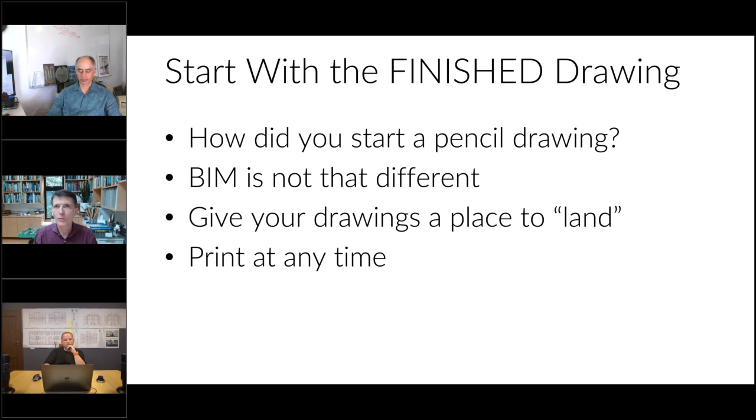So working in an office, you've got a deadline coming up, clients are going to be walking in the door in half an hour. You don't want to be messing around with your layout. You want to have that all ready to go. All you have to do is hit the button and go.

So this is a really dumb template right here. It's very basic. I mean, well, the model is dumb. It's just for, we don't design like this. It's just for illustrative purposes.

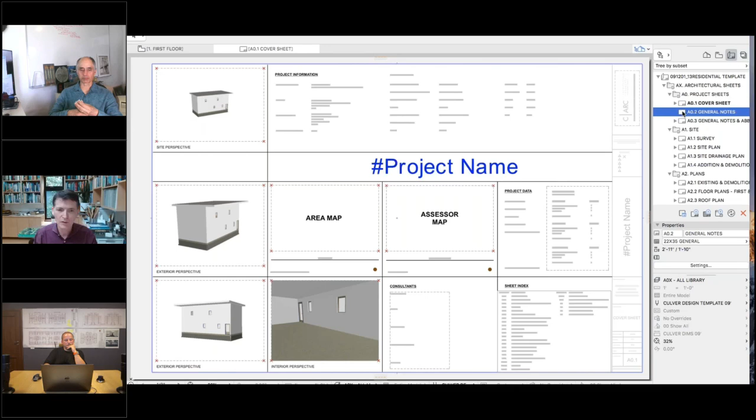But this is the cover sheet, and everything has a place to land on the cover sheet. So you've got perspective drawings, interior perspective, you got all the project data. It's laid out so that you can move on it, just like all of your other drawings and drainage plans and addition demolition plans. Everything has a place to go. So once you start drawing, they'll show up in the right places.

And you can expand the windows here for each drawing and make it fit your model. But you should do that early on once you've established how big the model is.

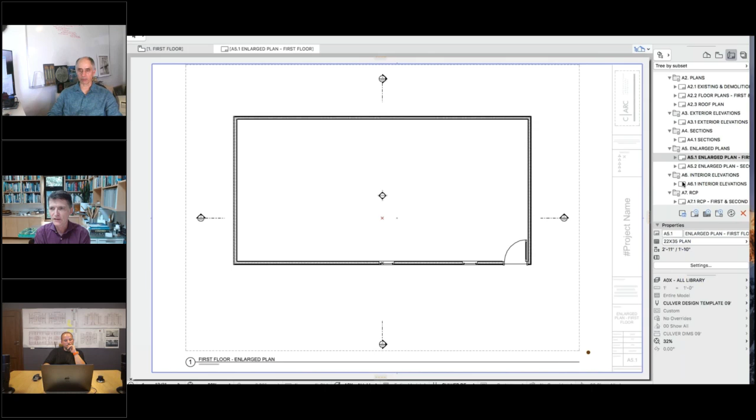And I've got to look to see my notes on this. Yeah, clear the windows. There we go.

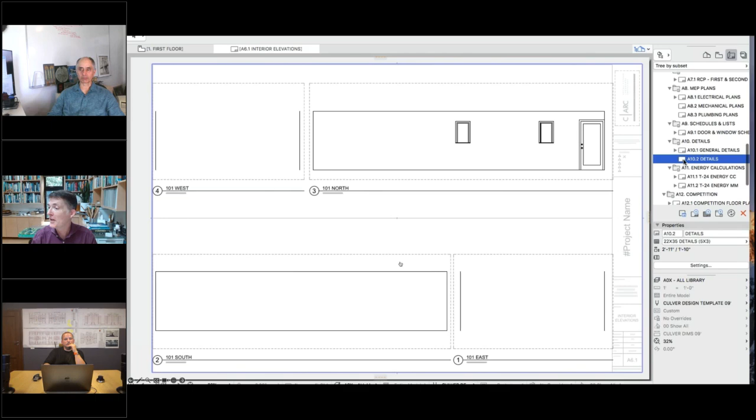Great. So some of these things are movies, so forgive me if I'm a little bit outside of myself and not knowing exactly what's going to show up because it's been several years since I saw this presentation.

So I think it's really important to model everything that you can. So you see here, we've got electrical outlets modeled. The kitchen is fully modeled with all of the counter overhangs built into the cabinetry.

Those are all built-in counters, built-in sink. All of the cabinetry modules within ArchiCAD can do this. Custom cabinetry, there's a custom pull-out or garage on the left side of the screen on the counter. There's custom details for the range hood. You see the lights sitting in there above the range.

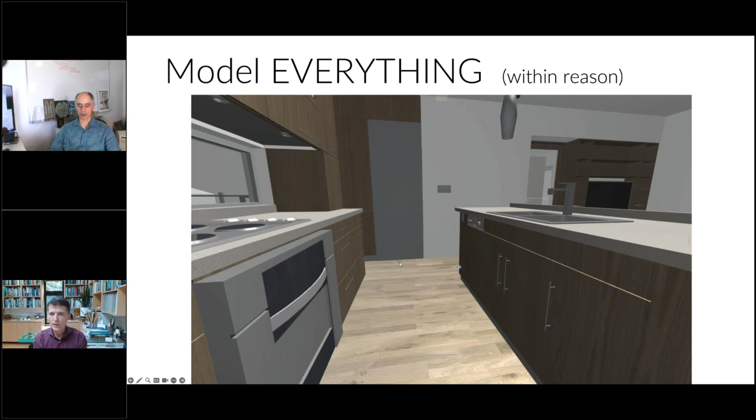As much as possible, you model everything. And the reason for this is that once you start changing things, it'll show up in your interior elevation drawings. So everything's here. So if the model of the kitchen changes, then this interior elevation will change too.

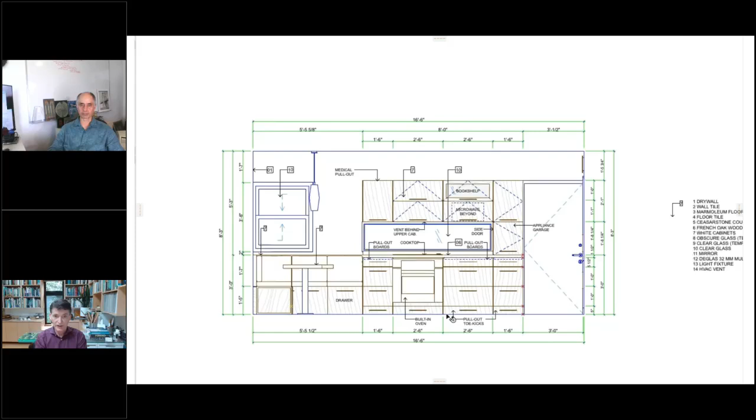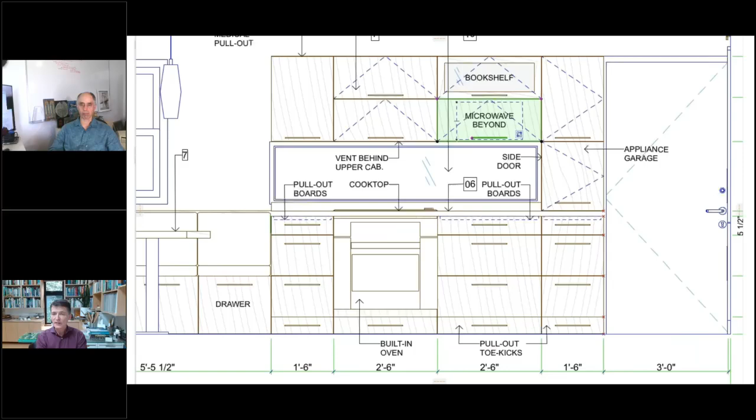So I think it's really critical. So here I'm just showing you, if I delete that drawer in the elevation drawing, it's going to be deleted in the 3D model as well, and vice versa. I think this movie is going to get me to that 3D model in just a second. Yeah, so I deleted here in this model, and you'll see it's being deleted in the other drawing as well.

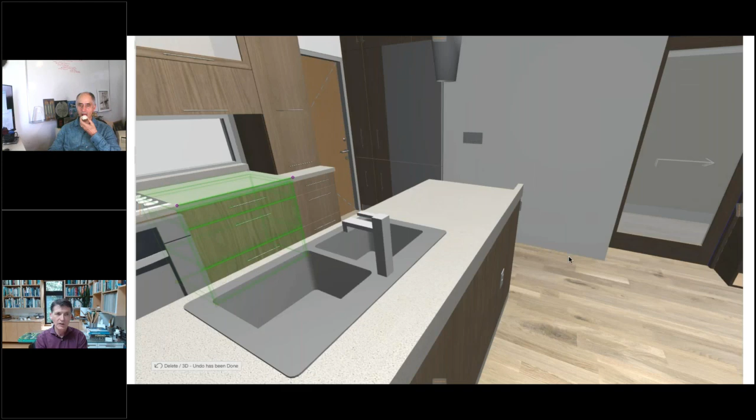So I'm going to show you an example of how things work. This is the 3D drawing. And this is now the elevation drawing. So in all the drawings that it's related to, it's going to show up and respond. Let me see if this movie is going to stop. Yep, looks like it stopped.

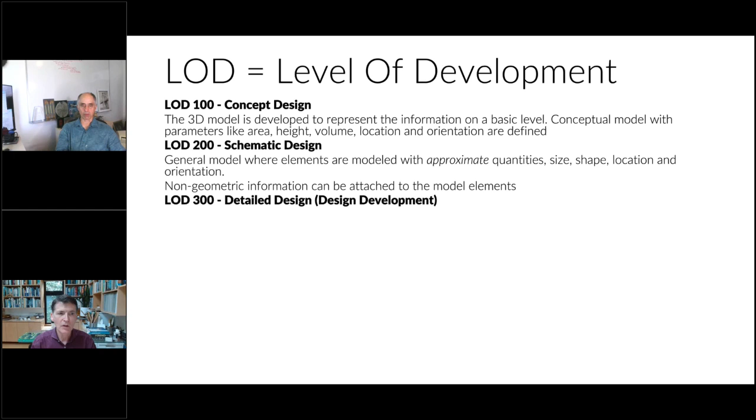Also, we talk about different levels of development, LOD 100. Honestly, I don't think about the numbers so much as I think about how do I produce a drawing really quickly at schematic design or pre-schematic design, and how do I produce drawings really quickly at design development, and likewise in construction documentation when you're really becoming granular here. So it's really important to not have to go back, and also fabrication drawings. I've done steel drawings too for structural steel and things like that, right in ArchiCAD, fully modeled.

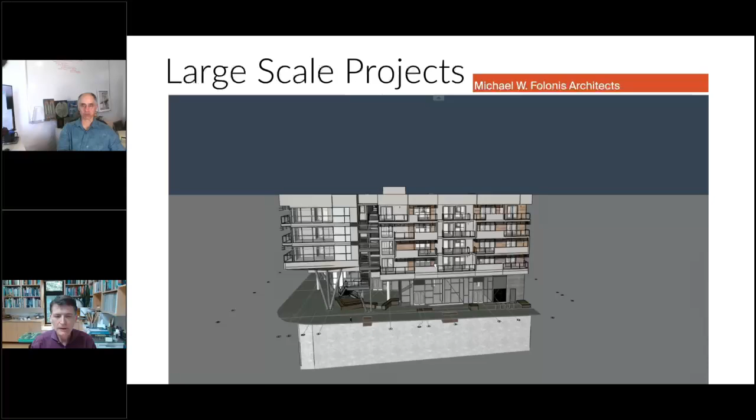So here's a large scale project, a 90-unit mixed-use building at the corner of Colorado and Lincoln in Santa Monica. This is with Michael Folonis Architects. And it's complex in a lot of ways, but something bad happened before I became the managing director and got on the project. This unit right in the middle with that yellow door...

All of these units, for one thing, are modules, which means that each unit is its own little project, and we design one and we replicate it on multiple levels. So this project probably has 15 units in it, although it's a 90-unit mixed-use building. And each of those units has a module, which is the kitchen, and another module, which is the bathroom or bathrooms, depending upon the unit.

And those modules might get replicated more times. So there may be 5 kitchen modules and 15 unit modules and 5 bathroom modules, so that you only have to design it once, and it fits within a certain space, and it goes from the small granular level of the bathroom or kitchen module, which is then referenced into the unit module, which is then referenced into the main module. So you're not chasing your tail, making changes on 90 units. You're doing it on 5 or 15 units. And all of those automatically get updated.

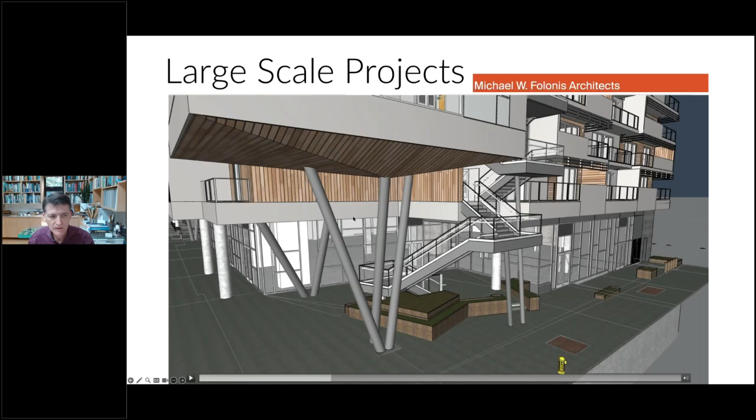Actually, this project had 16 modules. Now that I read my own notes, I think it really makes it much more efficient. This is a movie too, so what am I doing here? Is it going to play? I don't know. Here we go. Yeah.

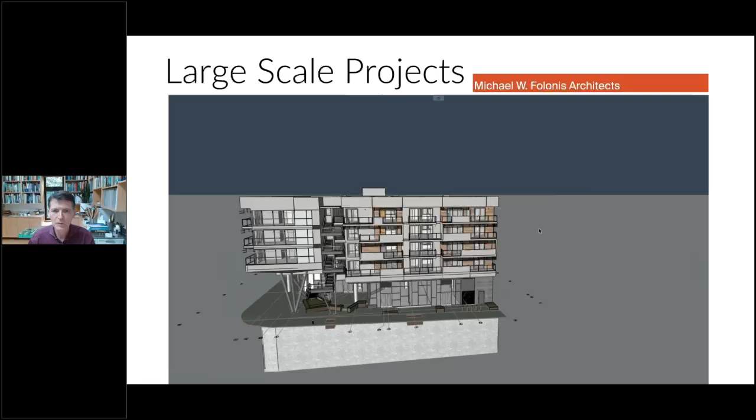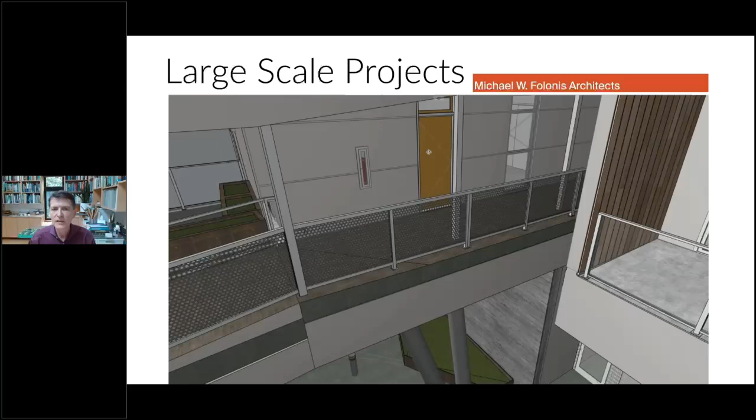And all of the things on the roof, if you take a good look, all of the solar panels, all of the heat pumps, the hot water boilers, they're all modeled so that we can see it in section, we can see it in plan, we can see when things change. Oh, I've already been to this one. So this is what you should have modeled in here.

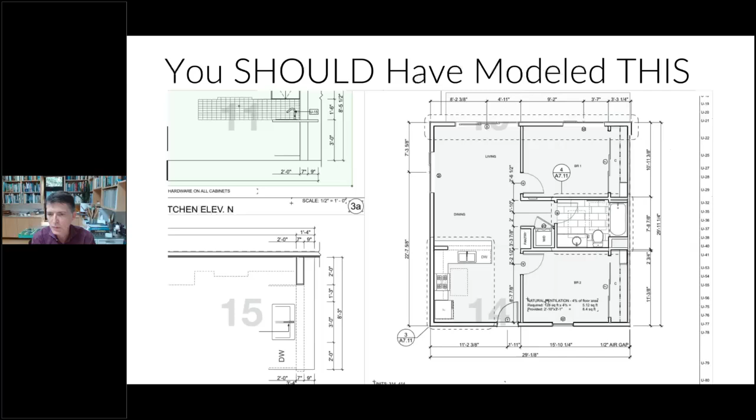So here's the interior elevations of the kitchen. There's the kitchen plan. There's the kitchen interior elevation, one of them. But if we open that source view, what do we find? It's a 2D drawing done in a worksheet. So this is a really bad idea, because always throughout the course of the projects, things change.

And in this case, we went through 2 CASP consultants. For those who don't know, that's a certified accessibility specialist. California has very stringent accessibility standards, and so we hire CASP consultants to ensure that the project complies. So the counter might have been 36 inches, which it shows right here, and it's supposed to be 34 inches tall in order to meet accessibility

standards. So that means we have to go back and change all of these 2D drawings, which is insane, when we could go back to the original module that we had and just change the counter height, change the cabinet size. Done. It should update automatically in these drawings.

Another thing you can do, you see we've got U03, U22, and we've got keynotes assigned to those numbers. You can actually, in the ID of each object, assign a name to it. And so when you click on it with an automatic tag, it will automatically come up with the label, like U03, U15, which is extremely time saving when you're going around labeling a project. And if you're using these objects over and over again, it's very easy to do, particularly if you copy and paste from one project to another, then it'll save that information.

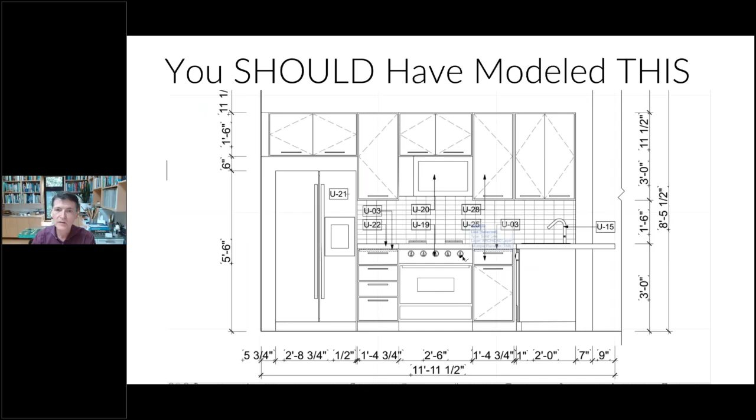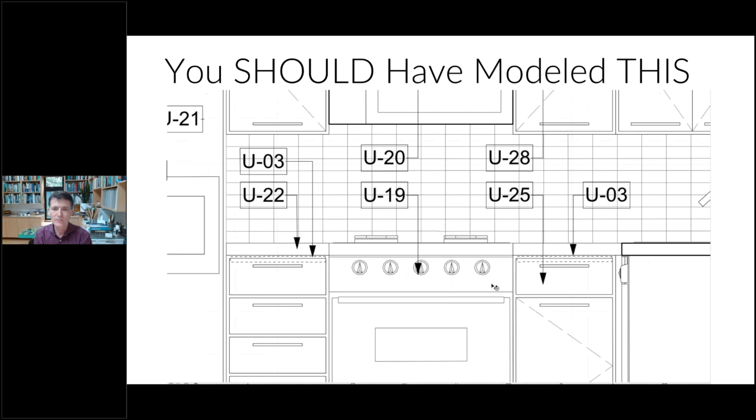I actually prefer to use CSI numbers because they're universally applicable. The Construction Specifications Institute numbers. And then you can reference those in the sidebar. So yeah, don't do this. Let's see. Oh yeah, you see now this is all blown apart. So that means that everything is fills and polylines and single lines, and it's just a nightmare when you go to change it.

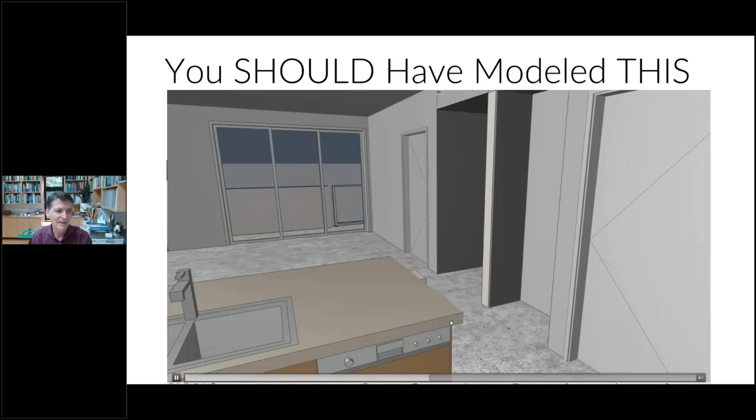So not sure where this model view is going to take me. Now, if I go inside, I think it's going to take me inside this unit. You'll see that it really, yeah, come on, we're going to turn it around. Turn it around. It has a few things in there. That's what got modeled in the kitchen, you know. So you can see it in plan, but it doesn't reflect the entire project.

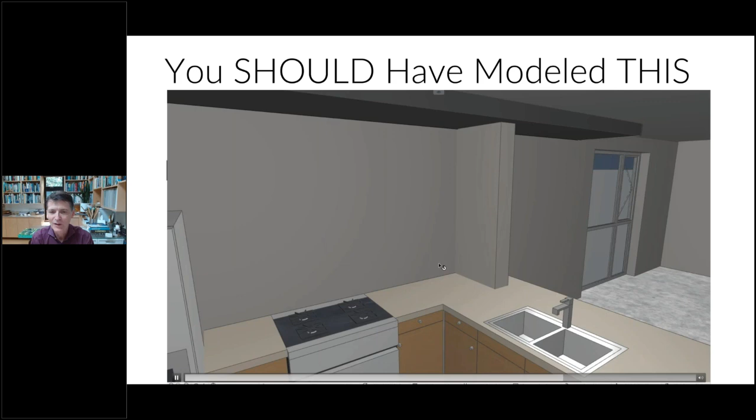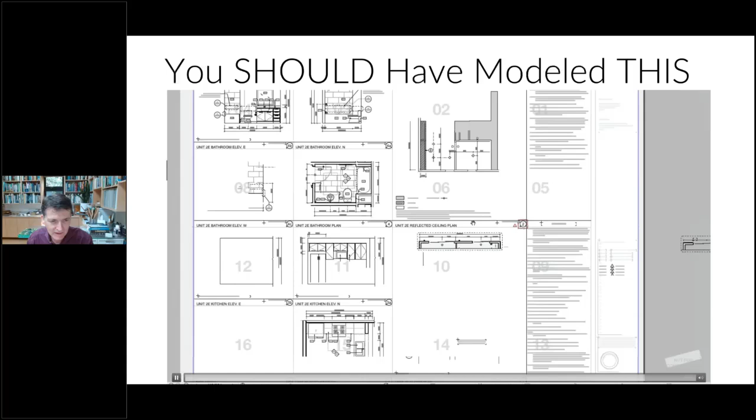And it was easy to do. You build it, you do it once in a kitchen module, and it gets replicated. So anyway, that's a really critical thing to do. 144 drawings had to be updated instead of 15. Okay, let's see. Can I get out of this? Yeah. Let's just move on.

Now here's something that we're looking at, the plumbing drawings, and the mechanical, plumbing, and electrical engineers were one outfit, and the developer didn't want to have to pay to have them model their work in BIM. It was an additional charge. And this is before I got involved, and Michael Folonis wasn't pushing them hard enough for that, because it wasn't really his experience prior to this time.

But because they didn't model everything in BIM, we couldn't import their model of their work and just determine where those pipes actually ran and determine the clashes well prior to construction. We would have been able to work out so many different things. As you see here, where RFI 342 is highlighted, there was a conflict. We had a piece of plumbing running right through the fire exits there, which took a lot of time to rework, and it got reworked during construction, because you can see this RFI is during the construction phase, and the contractor sent it to us.

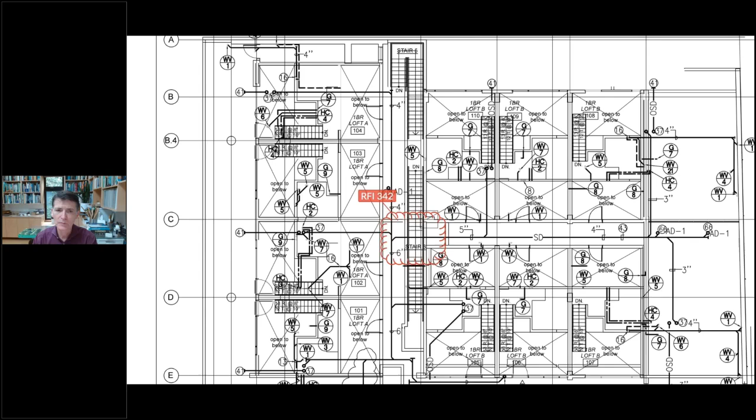So it's really important on projects like this to get MEP, M and P for sure, modeled in BIM, so you can detect these clashes. Should be no problem for them to do. Minor upcharge, and most people want to do it anyway.

This is just showing some of the other issues, because now you should be able to see where the plumbing is in your model, and we weren't able to work things out, but now you can see some of the loft units, these are loft units with a mezzanine at the ground level under the podium, look pretty clean, but others were just a mess. And we couldn't tell until the construction started. So anyway, we just talked about that.

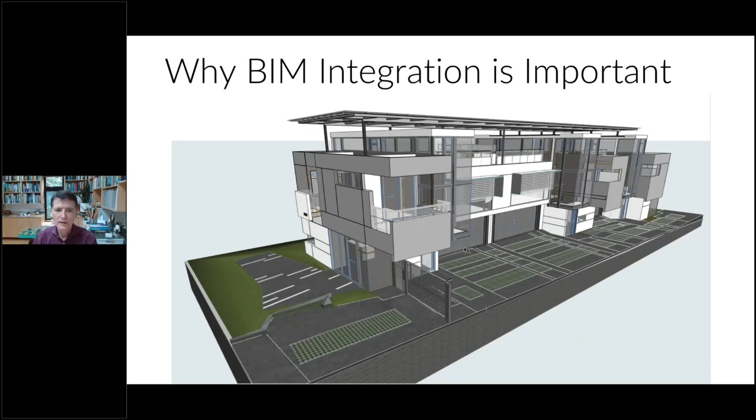Now here's another project. It's a 3-unit condominium, also in Santa Monica, also by Michael Folonis Architects. And another project that I came in late to the game. They were starting construction. Or it was just finished plan check. It was all approved and bidding, negotiating, and I looked at it, and there were so many things. This project in plan has got a bunch of angles in the middle of it, and we actually modeled this, I believe. Yeah, this is what we modeled.

But if you look at it, what we didn't understand was that there's a piece of steel there on the second floor level. Then there's a piece of wood sitting on it above that, and then there's a piece of steel sitting above that. Structural engineer hadn't worked it all the way out so that the steel could actually be installed all in one phase. Steel workers had to wait for the contractors to do some work down at the ground level. They erected to the second floor. Then they had to wait for the contractors to put in some wood so they could put their steel on top of it. This is a nightmare, right?

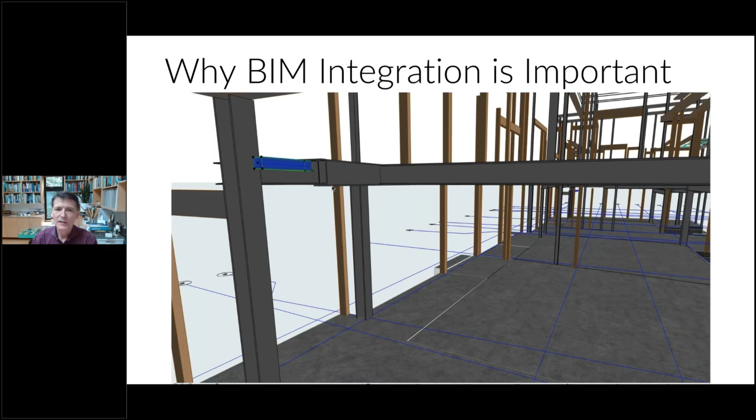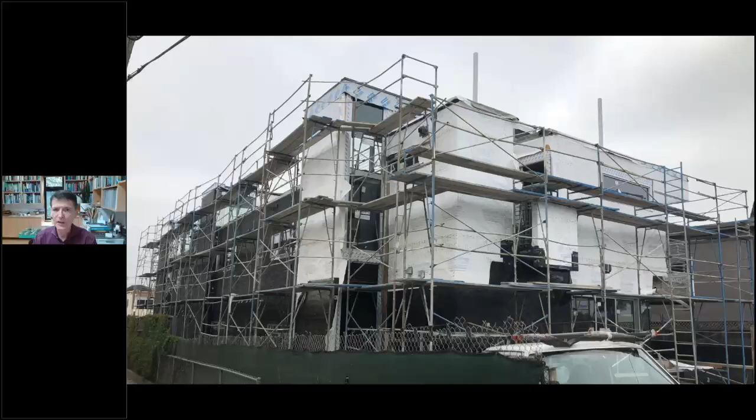So here's where it is. This is like a year into the project, and it was this far along, which is a year into construction. This is just insane. It was way too late. And so I think it took 3 years to build this project, which is far too long. And then there were other issues too that hadn't been worked out.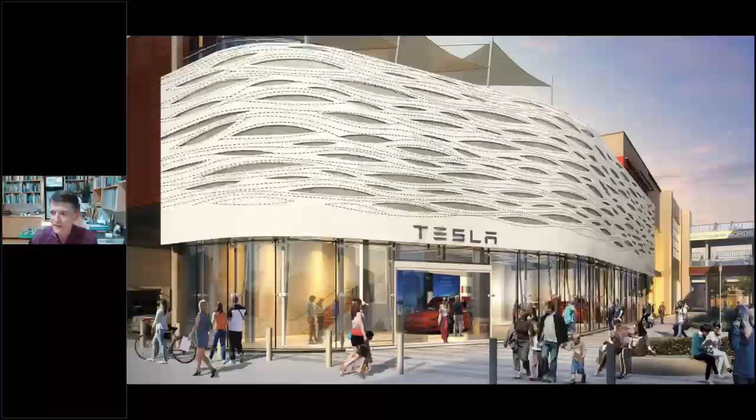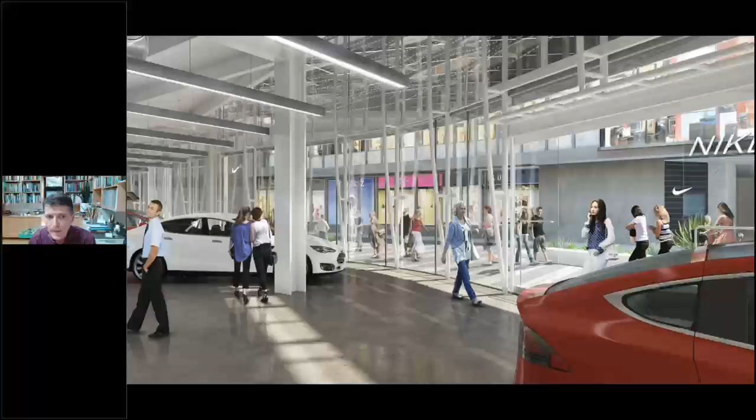Here's another project, Tesla showroom in Santa Monica at the Santa Monica 3rd Street Mall, across from the Nike store. And this was an extremely complex project that we did do good integration. This was with Novum Structures, who did the storefront facade with all of the structure, the bow truss columns, all of the glass, all of the standoffs, as well as the standoffs for the aluminum facade that's done by Arktura. And so everybody shared files.

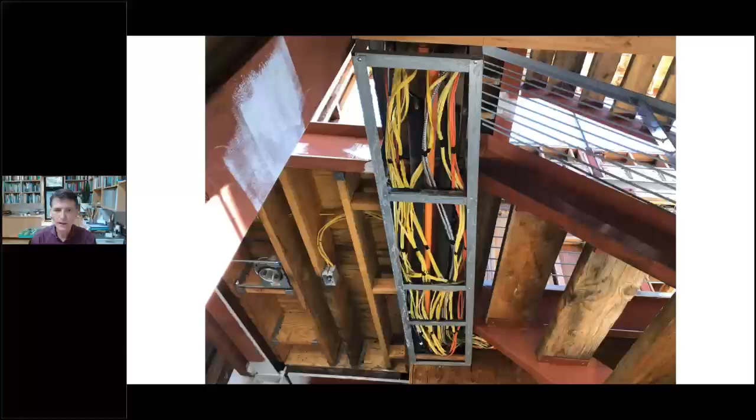Because the existing building had a lot of complex geometry in the steel framing, we actually had to get a point cloud scan done of the buildings so that everybody knew exactly where the existing framing was so that they could meet it, because there was just no way we could measure all of that out. And so once we did that, it was a walk in the park to get everything to align to meet the existing steel framing.

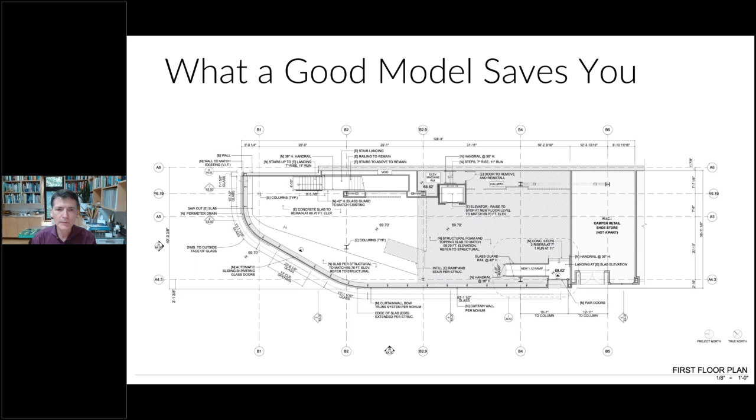And you can see this is actually part of it's an addition. On the bottom left, it's bowed out there. That was an addition so that they had more room for their sedans to fit inside. And so there was complex geometry in the roof framing, and it was modeled in as-needed segments for the section drawings. But unfortunately, it wasn't done properly.

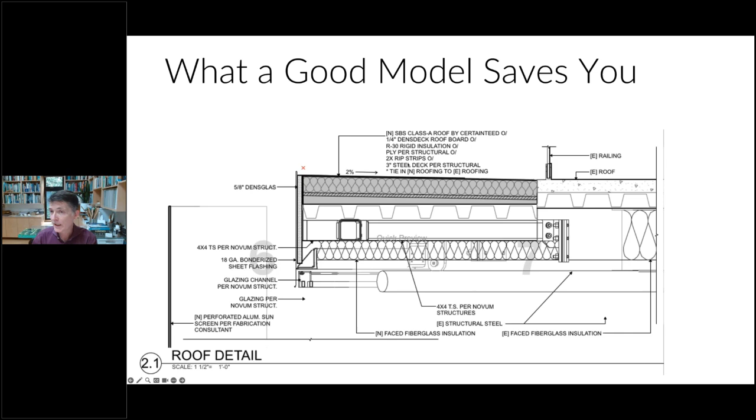The person who was handling this drawing didn't really think it through. Although we detailed everything well, this is what the construction documents look like, but it should have looked like this. And it didn't because the person modeling it didn't model the roof past that darkened insulated roof segment there. So you have to really watch this and make sure you have a good model once again. Because if we had a good model, this would have been really clear.

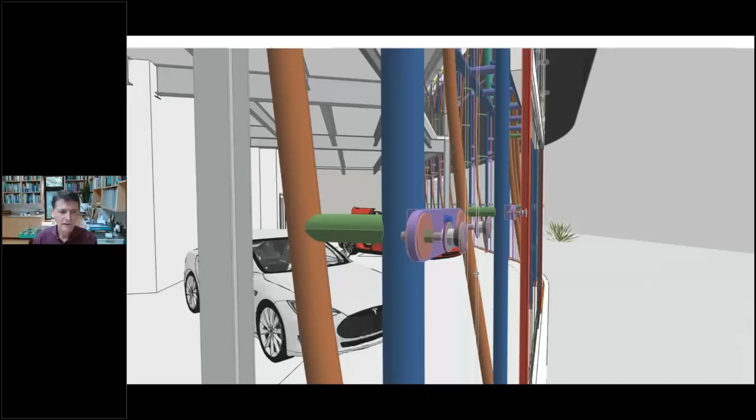It was pretty good. So here is the model that we have with all integrating Novum structures and Arktura models. There's that structure with all of the standoffs, and here we are with, we've got an S and an X. There's a 3 in there somewhere. All of this came together seamlessly once we'd worked out the models.

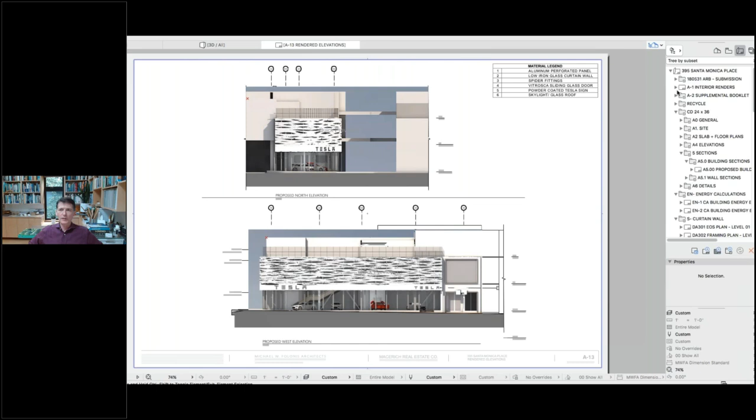Oh. And you see, we put everything into these books. This is the Architecture Review Board book, and so all of it is done in ArchiCAD, the whole thing. And it's live, so that you change the model while you're working. Everything appears in the book just the way it's supposed to, as well as the construction documents.

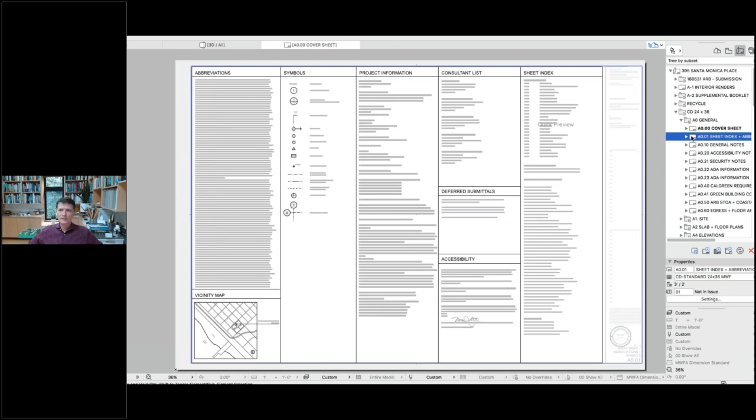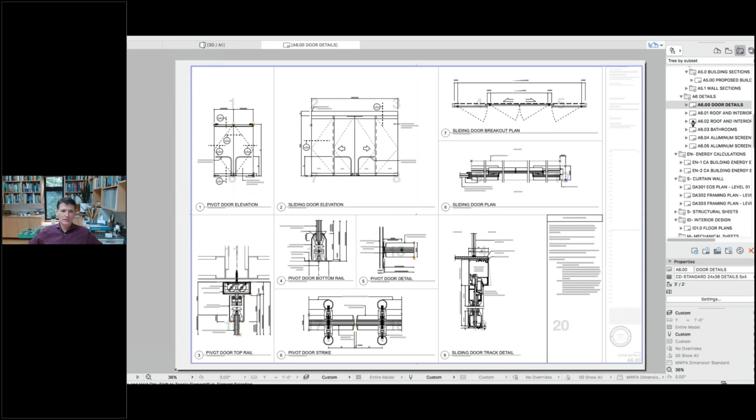Hey, Ron, there's a question about where did you get the Tesla model cars? I think we just downloaded them from the internet. They're everywhere, and don't forget that if you can't find an ArchiCAD model, you can import from SketchUp. So okay. I often import SketchUp models. Yeah, I never find any lack of options out there. Sometimes you have to work around a little bit. But honestly, the idea of having great furniture models is far less important to me than having a highly functional BIM software.

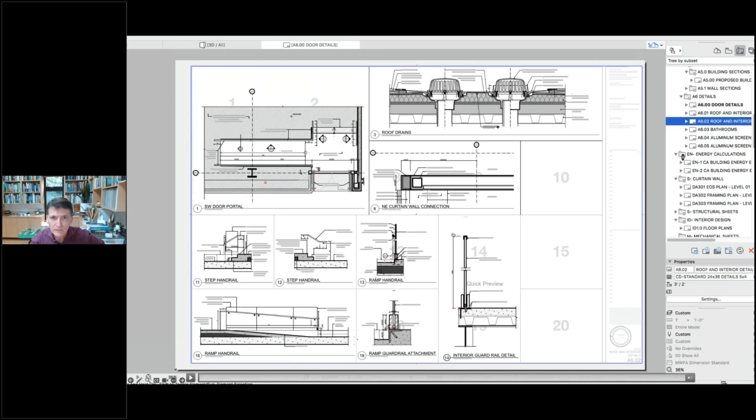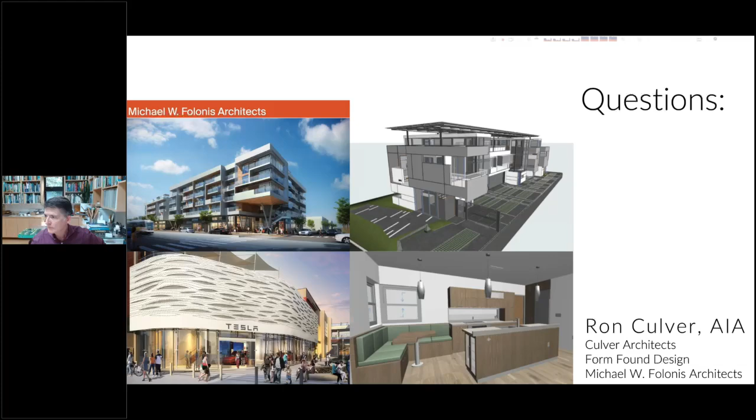Mm-hmm. There's a question from earlier. You can just work it into the rest of the presentation, about calculating schedules when you have modules, and how do you calculate so that you don't overlap walls and have them counted twice. And this is from Fran Parr, asking, modules would make the general layout a bit like a puzzle. When two modules are one beside the other, maybe walls overlap. So I guess you have to make some decisions about shared walls versus independent walls.

Absolutely. But if you think about multifamily projects, the unit to unit walls, they have their own walls. There's always a double demising wall, and then we leave a 1-inch gap, so the walls that meet end to end are sticking out a 1/2 inch from the demising wall on each side. So you put your reference line so that you know the grid is a 1/2 inch away from each demising wall. It's right in the middle. You just work out your protocol for how you do that.

And then if you find that there's something overlapping for some strange reason, you just pull that wall back, and it all works out in the end. It takes a little bit of extra thought, but it's far easier to do it in a module. And sometimes you'll have an exterior skin piece that wraps outside of a module, depending upon the aesthetics; you can always do that too.

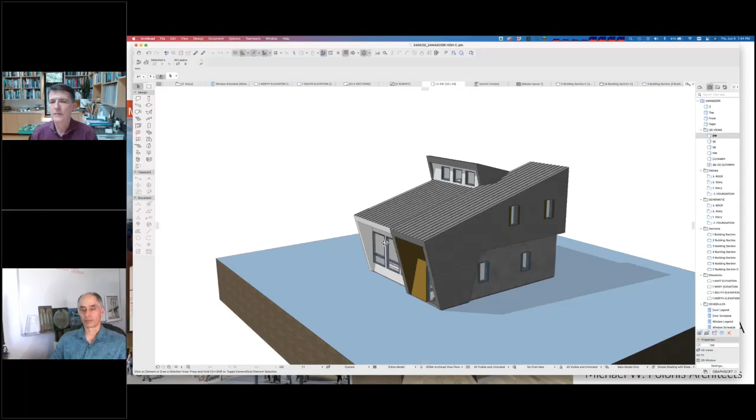Okay. So this is a little project in Armenia, and it's a single family home. There's going to be a bunch of them on these lots. Some of them are shaped like this. Some have got a different roof aspect, but they all have a similar kind of thing. It was using inspiration from jet manifold intakes, looking to sort of create a new vernacular in Armenia.

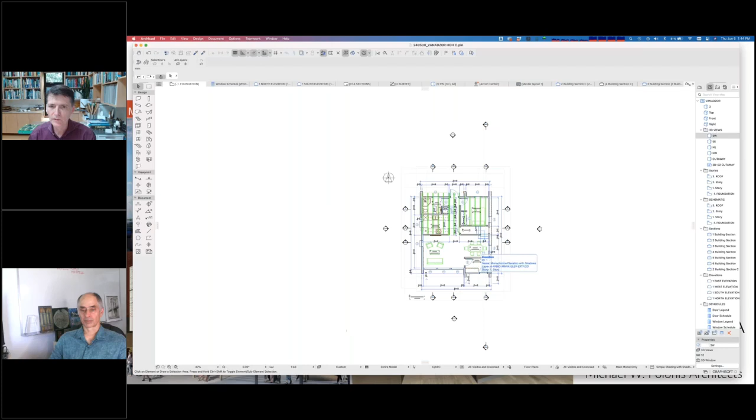And so there were some challenges that came up with this project, and one of them is quite simply the way these walls terminate on angles. If I look at the floor plan going down to the ground floor, and I'll turn off these trusses, you'll see that there's two walls that meet here in order to create this thickness. There's a wall side by side. So it's not like we can just chop that wall at the end, and they've got different finishes.

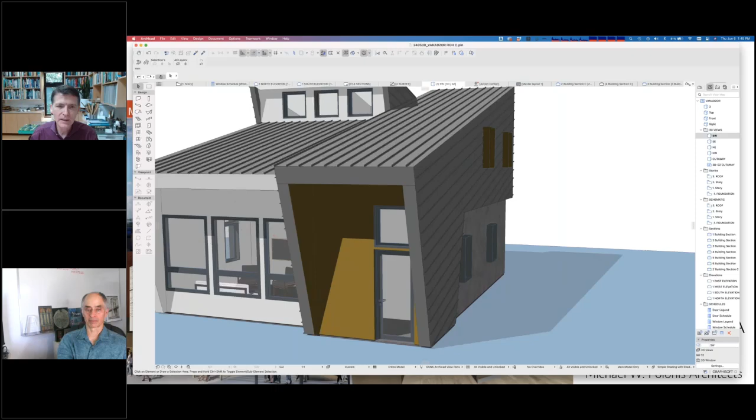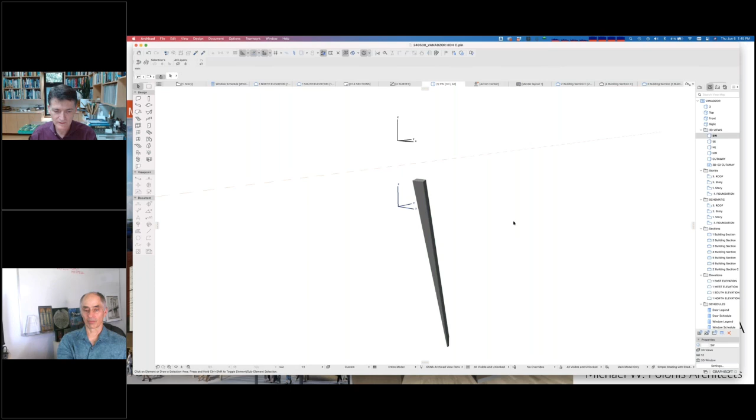You could put a solid element operation here to create that angle. But what I found worked even better and made a nice clean model, clean ends everywhere, was to put a little angled wall right here. This is that wall on an angle. And then the side panels, these are two different walls, so two different levels, both intersect with that single angled wall.

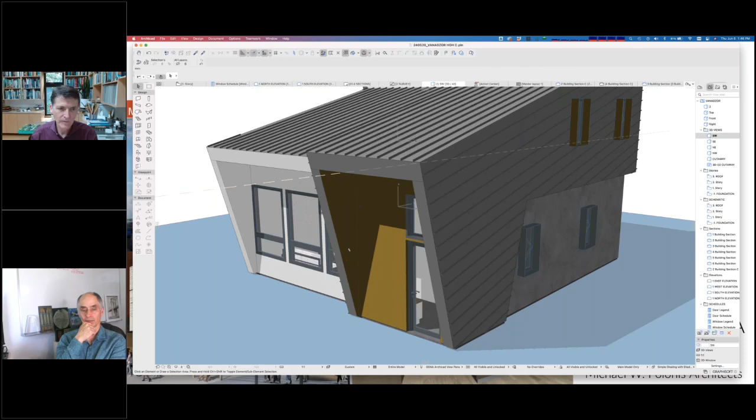And what I also noticed was sometimes it didn't work out all that cleanly, and I'll show you. Then there's these end walls. They're really hard to select because ArchiCAD likes to show you stuff that's inside the building now, and maybe one of you guys can tell me how to turn that off. But each of these has a solid element operation that is being subtracted from the roof. So I could take this wall, come on now, find me that wall. There we go. I could take this wall and extend the top of it up back here. Well, it's not from the roof actually, but you see.

Look what happens when I... that didn't do that. Let's try it again. Try to see if I can get this one to get screwed up. No. Let me try a different wall. But you see, if I do it wrong, maybe I'll get those lines showing up in the model, which is not what I want. Let's see if I can get it to go bad on this one. No, didn't do it. Interesting. Oh well, sometimes those lines show up.

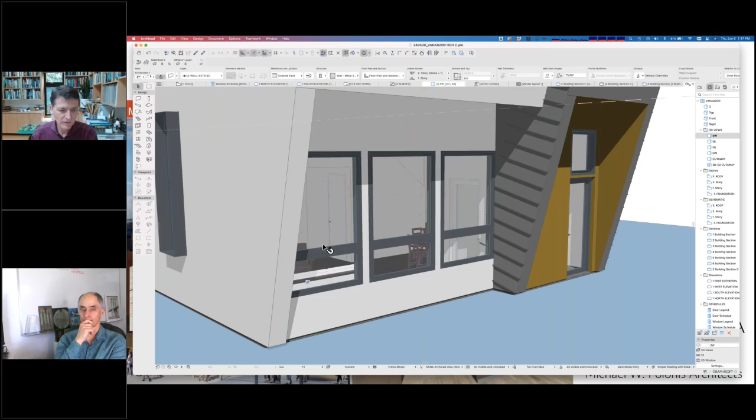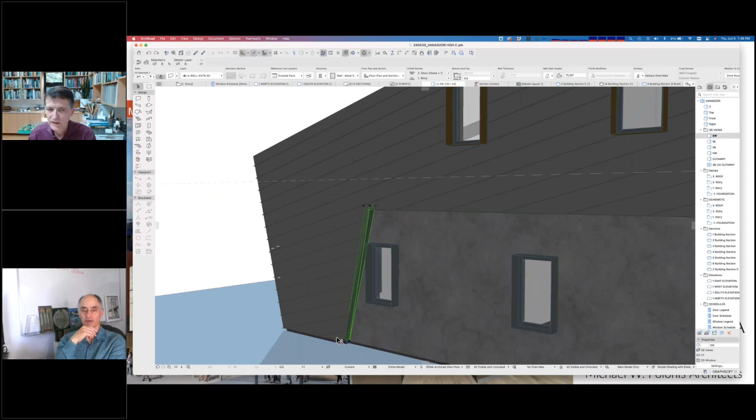But the basic concept here is that these side walls will intersect with the end wall and then also the interior wall. So it just does a complete U-turn around this end and it makes a nice clean wall. Do you actually have separate walls for exterior and interior, or is it just in that context where you have this sort of applied wall? Always separate walls, interior versus exterior. This is my exterior wall type, and this is the interior wall type, if that's what you're asking.

No, but on the outside skin? No, it's all one wall. It's all a composite. So all of the exterior walls look like this, which is metal 3 5/8, insulation and siding. So it's got rigid insulation, 177 millimeters. This is all metric because it's in Armenia. It's all a composite.

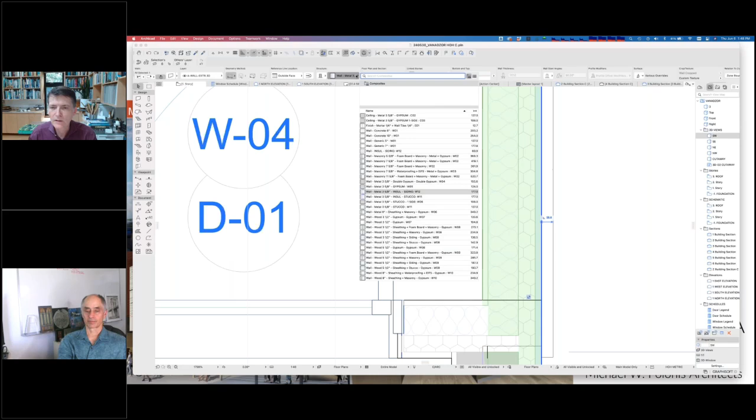All these walls are composites, and then what I did, because I really like to model everything, I was having trouble getting the siding, which is angled, to look right on the model, on the elevations, because the exterior edge of the roof would have this angled siding. You can tilt your...

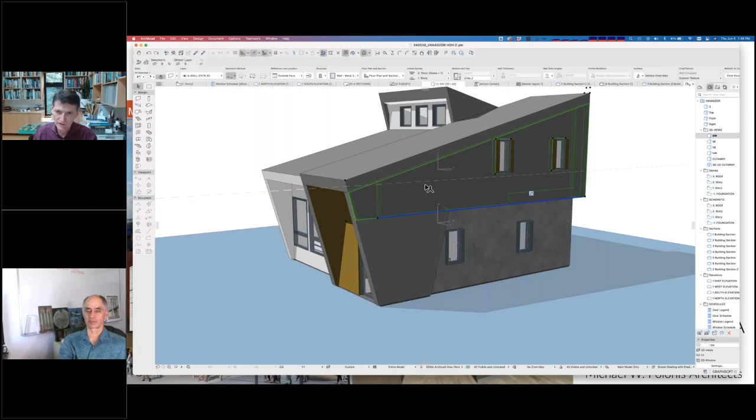The hatches as in the model itself. You know, if I opened up... I don't have it in this model anymore, but you're doing this with a beam that is inclined, and it's a custom profile with a bunch of little pieces. Right, so let me do this. I'm going to turn off these custom profiles. I'll show you what I did. So I can open up this, and I can make this.

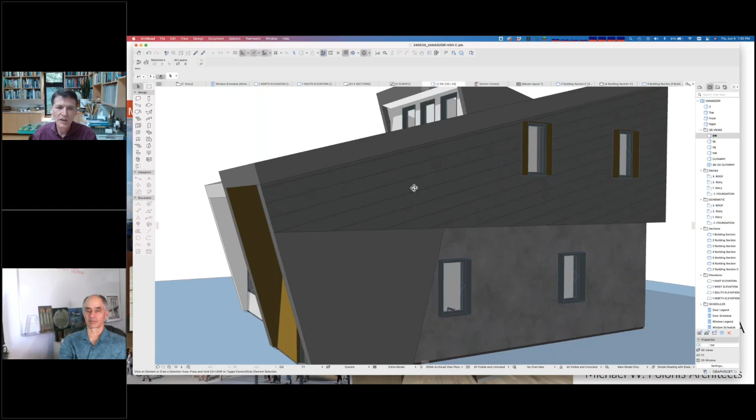This was a metal standing seam at 15 degrees, and maybe it'll go in the right direction, maybe it won't. Yeah, so this is the way I originally did it, where you can see the siding here, the lines going up at 15 degrees. But then you have to get everything to align, and the edge of the roof didn't line up with the edge of the wall, so you wind up doing a bunch of fills.

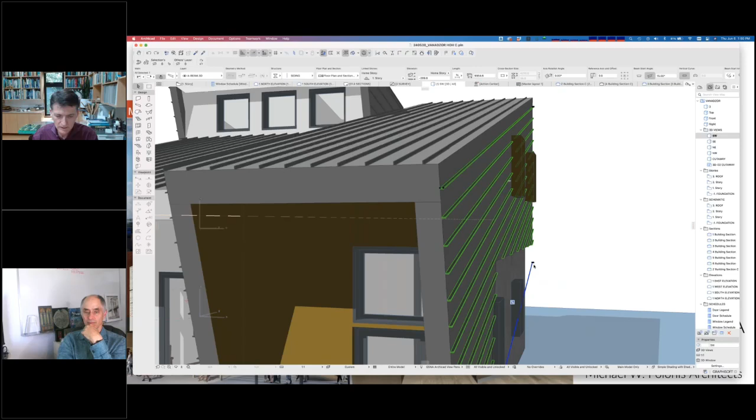So what I ultimately did was use complex profiles to create the siding, and it's just a beam. This is the beam. You can see that, and it's using the profile called siding. But I also created siding 1, siding 2.

Let me see if I change it to siding 2, see what happens. Siding 2 goes a little bit taller. You can see that. I just added more pieces to it, and they're just a simple rectangle, as you can see there, at the spacing that I called out, I think it was 300 millimeters.

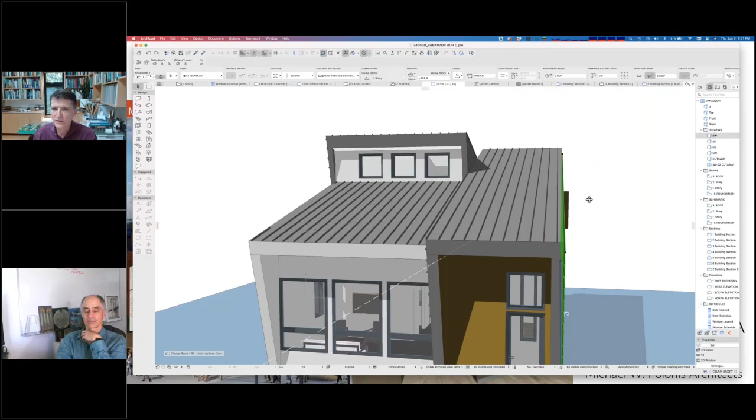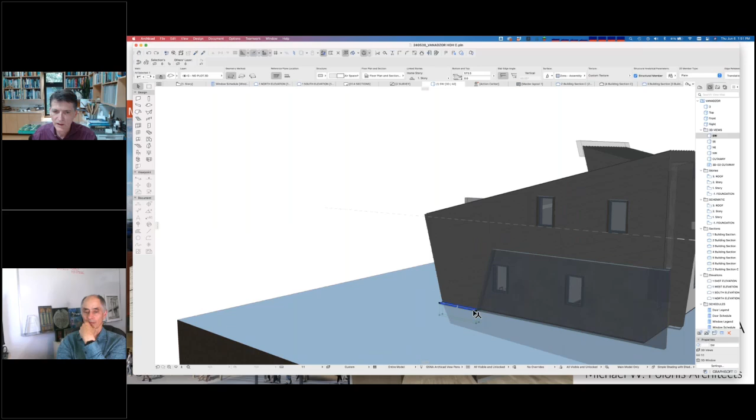And then if I flip the layers over here, I did have to use solid element operations to carve out the pieces of the siding. So this is a block that there, and there's one down at the bottom. But I didn't do that to the walls because it cleaned up much more easily to do the wraparound wall returns. But then there's just these little pieces of siding in there, and the roof is all a beam as well.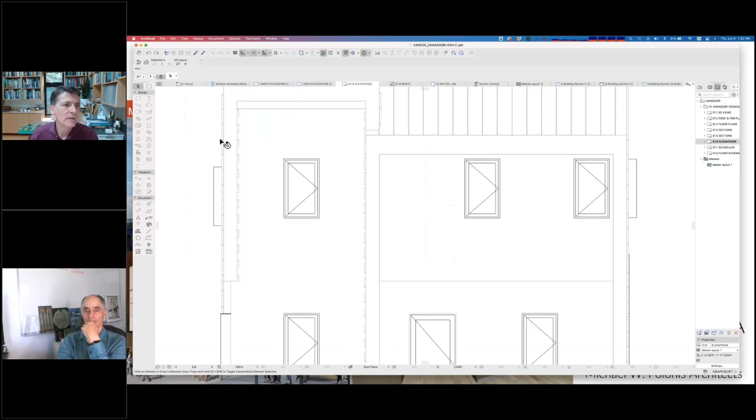And it just seemed to be a much cleaner way, because now when I go to the elevation drawings for this project, everything shows up properly. And you can see the edge of the siding popping out past the wall over here. And you can see it on the inside here. It's clean, right? So sometimes you need to model these things to get the results that you want.

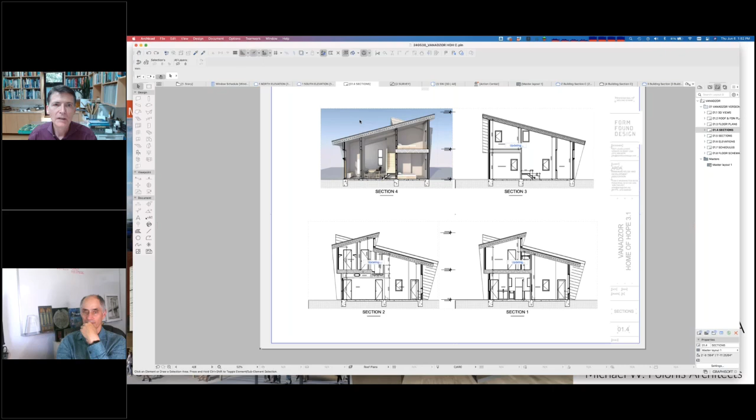Then there's another little thing that we did, which is a rendered section drawing. Now, excuse my footings, I didn't get into the angles on this particular one. It's a rendered section drawing with trusses rendered and steel studs and interior view.

And if I open up this drawing, I believe it's actually two different drawings. Let's see, yep, so there's two different drawings here. One's overlaid - the section drawing is overlaid on top of a sectional rendering. And that was done in Maxon, straight from the model.

So if I change something, it will change as well. Does that make sense? And so then you can get this sort of nice combination of nice rendering, nice section drawing.

Dave Olaf's asked about the raised profile for the wall and roof finishes, which we saw. Yeah, so those are all beams, the raised profiles, and I highly recommend people get into complex profiles and go into my profile manager.

If I can find that screen over there, it's on the other side. I go into those section drawings and I'll show you the siding drawings. And if I go to... why can't I edit that?

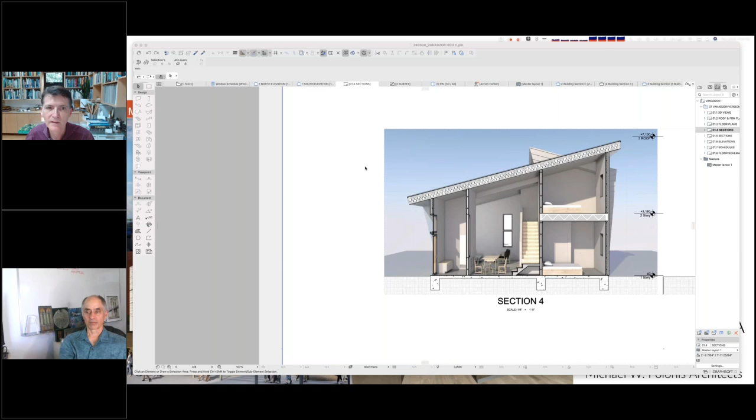Siding 3, siding 4, why can't I edit it? I must have done something there. Let's try it now. You need to go into a plan view. Oh, well, there you go. I knew that. See, now I can edit it.

And it's just those rectangles, as many as I needed. I always locked one corner to this zero point, and that's it. Very simple. That's all those things.

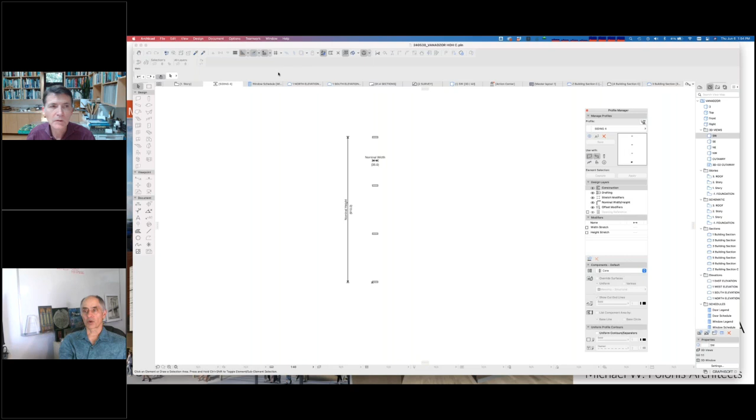So about 5 more minutes, Ron. Do you have another project? I believe you do. So I've got another one too, which was a little bit more complex.

That one has this wraparound stair, and you'll see that I've actually made some errors in this, and it's not finished. You see this roof isn't supposed to be square over here. And it's just a white model that I'm working with, a little reveal for the second story.

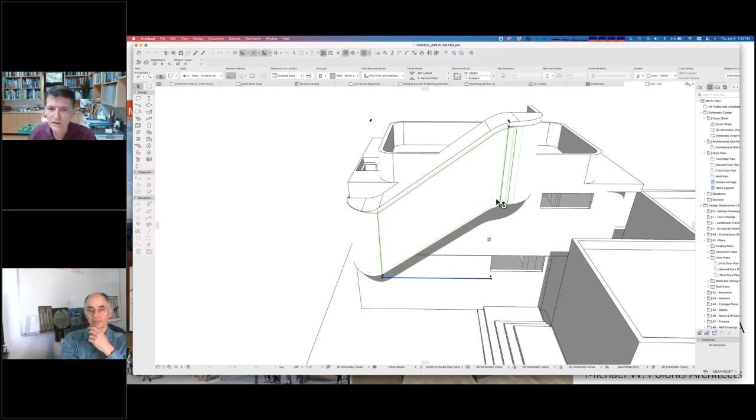This stair wraparound was made with a bunch of different things. This is just a standard wall that is differenced out by a beam that I made out of a complex element profile. It's called south bottom stair, and then there's another beam at the top.

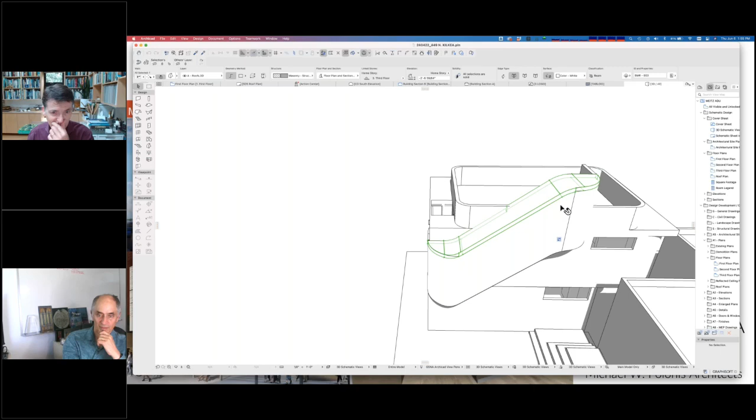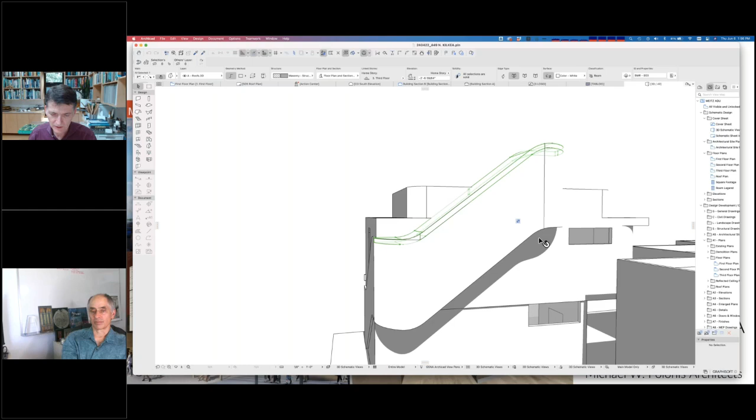That beam at the top I actually used as a morph. I cut it into a morph and I'm now going to move it around. This top piece over the door is going to project, but it has to be modeled a little differently, because it didn't make a clean resolution here. So what I'm going to do is change that morph to be just inside the walls, not try to be the roof and the solid element to trim the walls.

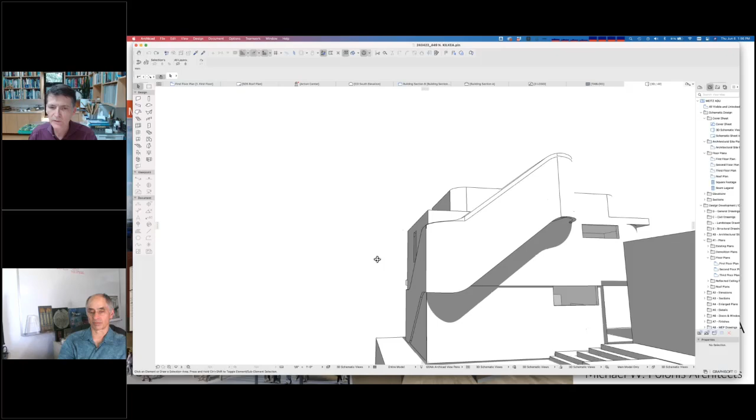I'm going to have another beam that goes to the top of this to trim the walls, so the walls will go all the way up and you won't see these seams. Once you've made these profiles, which is easy to do in elevation view, plan, or a worksheet, it's pretty simple to have them trim these pieces.

So this is a little ADU sitting behind an existing single family dwelling. Okay, that's all I've got.

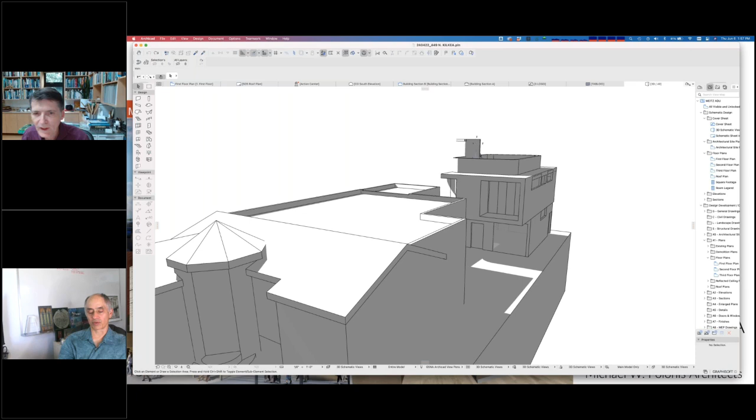You work in the white model view a lot for conceptual work? Actually, yes, to present. It's a better way to present, because what we really don't want to do is show the client materials early on. We want to show them form. We don't want them to get too married to the idea of what something actually looks like materially. We want them to see shape, and then we'll talk about materials.

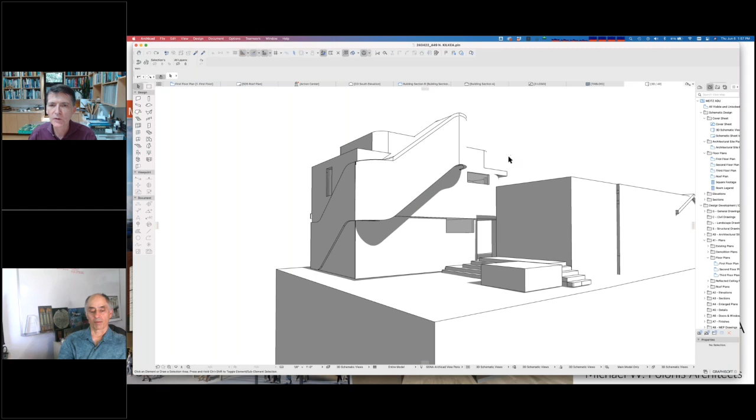But we've left ourselves some options by kicking the second story out a couple of inches. We're able to transition from one material to another, so we can get this second story volume to look like it's floating over the ground floor. We talk about that to the client, but we don't model it right now.

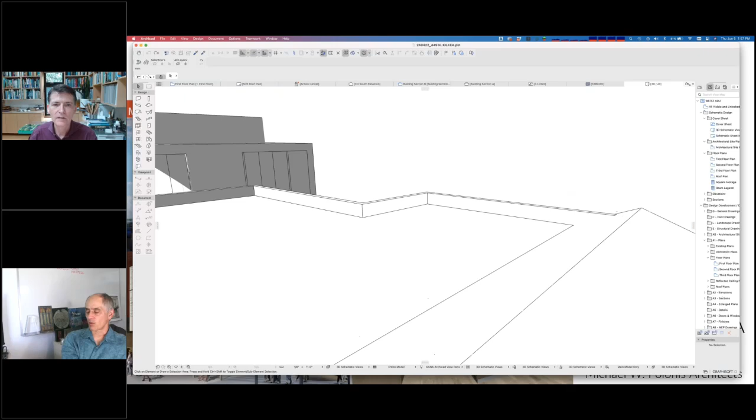I want to go back briefly to your big project with the Tesla that was done all modeled, and you mentioned different models being integrated together. Were they done through IFC? Were they done through the BIM server? Did you import stuff and have a copy of the other consultants' models inside yours? What did you do?

IFC was the method of choice. They weren't working in ArchiCAD, they were working in Revit or sometimes Tekla. We brought in Rhino models too. We used IFC as the standard import/export.

Okay, so you had essentially a copy of their geometry in your model to coordinate with. You could make notes of issues. Did you use BIMX at all?

We didn't on that project, but we use BIMX all the time. I find once there's a reasonable model to share with a client, it's a great way for clients, particularly single family clients, to be able to visualize something, people that haven't looked at architecture or BIM models before.

It's a great method. I don't have a BIM model handy, but the Vanadzor project, if you type in Vanadzor, you'll probably find that model in the BIMX library. That's Vanadzor, Armenia, so that model will come up.